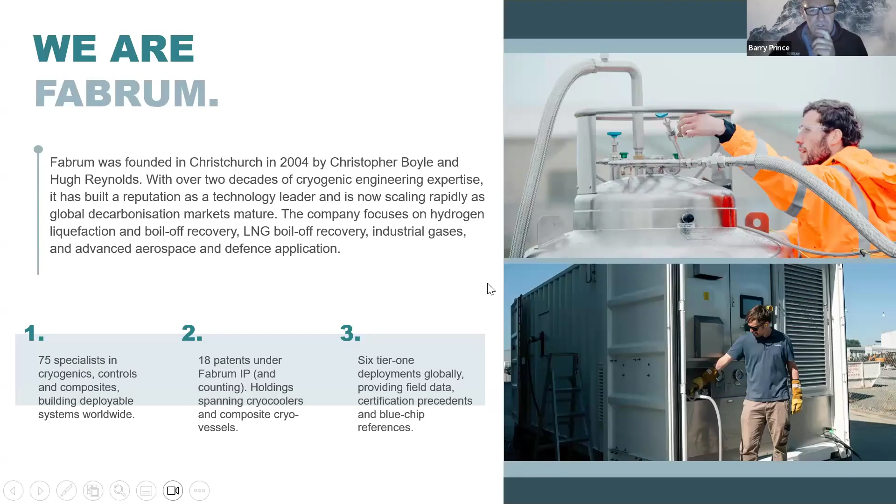Well, for that to be true, liquid hydrogen is a key part of that whole hydrogen ecosystem. And so with all of the expertise in cryogenics, FABRUM felt it could make a significant contribution in that space, as we're currently doing. So just to give you a bit of an idea of the sort of work that we do in the hydrogen space and our expertise, I'm just going to show a recent project that FABRUM was involved in. So this is a bit of drone footage from a mine site in Western Australia.

The client for this project is a company called Fortescue, a big iron ore mining company based in Western Australia. They wanted to demonstrate that they could decarbonise their mine site. Specifically, they wanted to demonstrate they could run their big haul trucks on liquid hydrogen. To do that, they needed a liquid hydrogen liquefier on site.

So Western Australia is a fairly remote place. Perth is the capital city of that state of Australia. Perth is the most remote city in the world. And this mine site's about 1,000 kilometres north of Perth. So very remote location, very punishing environment. The temperatures regularly go above 50 degrees Celsius. And it's a very dusty environment.

So what you're looking at in this photo, in the background under that canopy, are electrolyzers. They're being fed electricity from a solar array, so they're producing green hydrogen. That's fed through a pipeline to the plant at the front here. That's the hydrogen liquefier that was designed and manufactured by FABRUM. So all of the cryocoolers that are doing the cooling of the hydrogen are in the 3 containers in the foreground, and the containers just behind that have all the heat rejection and control systems.

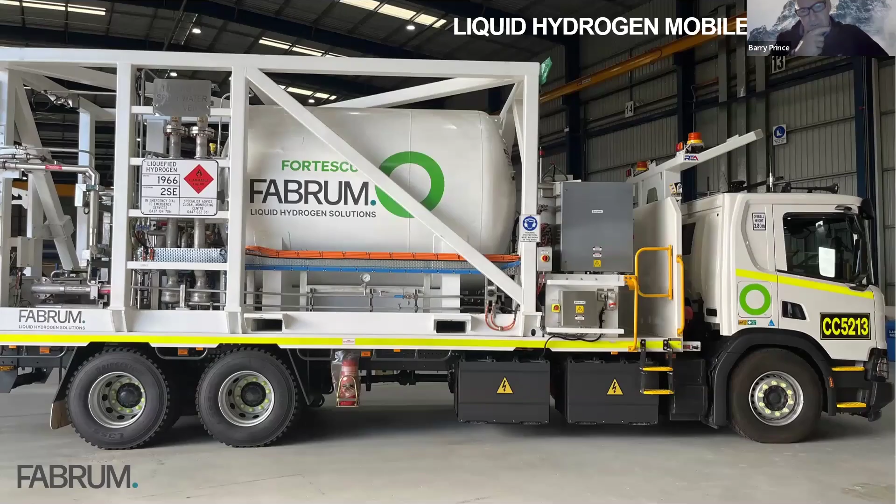And the primary vehicle that it is refueling is this. This is a liquid hydrogen mobile refueler. It carries about 600 kilograms of liquid hydrogen, and it has all of the infrastructure on board for doing liquid transfers. It's built into a standard 20-foot ISO frame, so it can be easily transported or relocated. And this vehicle will then refuel liquid hydrogen into a couple of other vehicles.

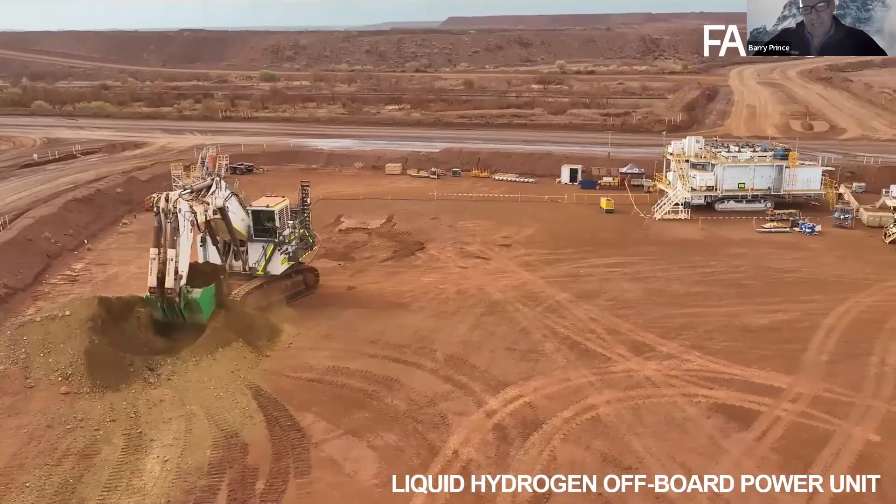Firstly, the vehicle on the right-hand side of this looks maybe a bit more like a building than a vehicle, but you can see it's on tracks there. It can travel around behind the excavator on the left. That excavator is 100% electric powered and, difficult to see, but there's a big power cord running along the ground to the vehicle on the right. It's called an off-board power unit, and the off-board power unit has storage of about half a ton of liquid hydrogen that is feeding fuel cells, producing about 1.3 megawatts of electricity to power that electric excavator.

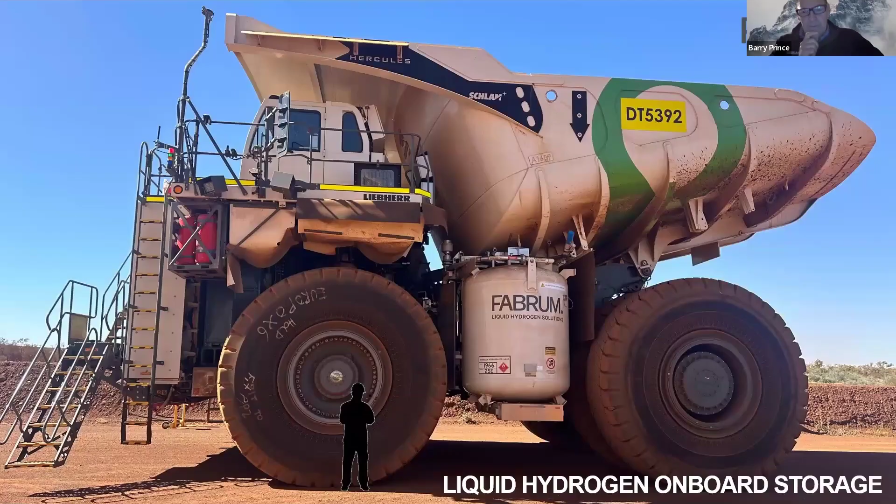But ultimately, this project was about proving these trucks could run on liquid hydrogen. So this is a 300 ton haul truck. This truck would typically consume about 2.5 to 3 tons of diesel in a 12-hour shift. This truck running on liquid hydrogen will do that 12-hour shift by consuming about 500 kilograms of liquid hydrogen. And that hydrogen is stored in 2 of those FABRUM tanks, one on each side of the vehicle.

And so, as I say, this is quite a nice demonstration of the sort of work that FABRUM gets involved in. Everything in this project that had anything to do with liquid hydrogen was designed, manufactured, and deployed by FABRUM. So that includes the hydrogen liquefier plant, all of the liquid storage, the liquid transfer systems, dispensing and refueling systems, onboard storage, and the storage delivery systems.

So if you look at the products that FABRUM manufacture, they're largely underpinned by 2 technologies that the company has developed. So I'm just going to talk about them on this slide. So firstly, on the left, we have a proprietary cryocooler. In the middle of that circle, you can see that cryocooler. It's essentially a very powerful refrigerator, works on the same principle as your domestic refrigerator at home, compressing and expanding a refrigerant gas, but much more powerful. And that underpins all of our products that deliver cooling power. So it's nitrogen and oxygen liquefiers, natural gas liquefiers and boil-off gas management systems, and of course our hydrogen liquefiers and boil-off gas systems.

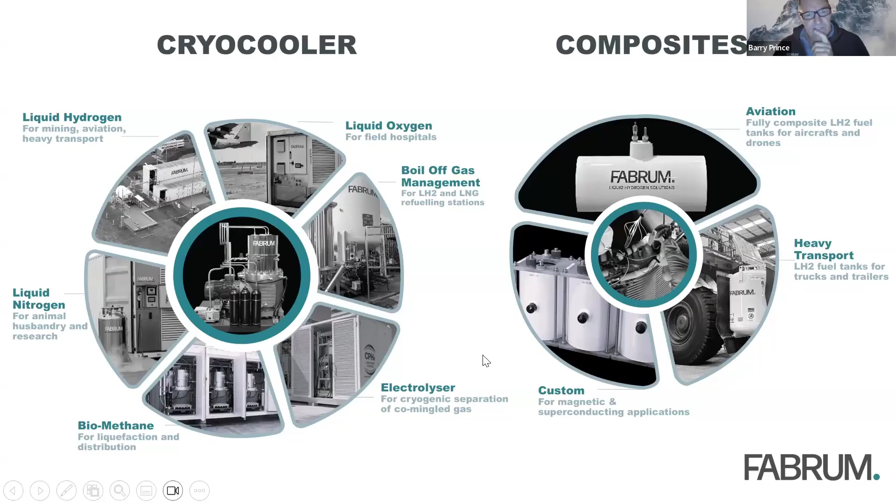On the right-hand side of this slide is the other core bit of technology that FABRUM has developed, and this is manufacturing techniques that enable us to build these super lightweight storage vessels for liquid hydrogen. That, of course, is what we're going to get into in a bit more detail as we roll through this talk. So before we get onto the tanks, what are the other products around the cryocooler that FABRUM are producing? Because these do also have some relevance, as we'll see, in the aerospace sector for hydrogen powered flight.

So firstly, the hydrogen liquefiers. We've talked about the larger one at the top left of this, the system that's installed in the Pilbara in Western Australia. To the right of that at the top is a system built into a 40-foot shipping container that will produce up to 75 kilograms of liquid hydrogen a day. That system pictured there is currently being installed in Germany at the Karlsruhe Institute of Technology at their energy lab. In fact, it's at the heart of their energy lab, producing liquid hydrogen that's underpinning all of the R&D that they're doing for cryogenic hydrogen at that site.

Bottom right is a smaller scale liquefier that we produce. We call it a development scale, and it can be configured to produce from 3 to 20 kilograms per day. The liquefier pictured there is operating in Kemble, Cotswold Airport in the UK, actually the site where ZeroAvia are based, and that's been operating for a few years there, producing liquid hydrogen that's supporting the development of technologies for liquid hydrogen in aerospace.

And finally, on the bottom left is a system that's in a 20-foot container. It can operate as a liquefier and produce 30 kilograms a day liquefaction rate. Actually, this system uses a different technology to the other liquefiers on this page. And so as well as operating as a liquefier, this can operate as a reliquefier, okay? The difference being the temperature of the hydrogen that is being supplied to the unit. So a liquefier is taking hydrogen from ambient temperature down to the condensation point. A reliquefier is taking boil-off gas, so it's taking cold hydrogen that's in gaseous state and just dropping the temperature a smaller amount to recondense it, and so that's a boil-off gas management system.

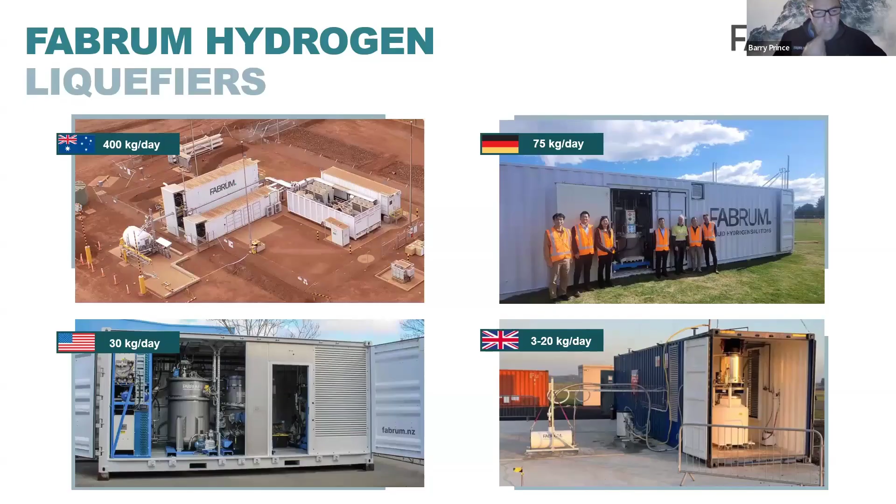So there's two main sources of boil-off gas in that space, and that's the normal evaporative rate of the liquid hydrogen storage tank, but also the cryogenic pumps that are used to compress hydrogen to boost the pressure for refueling produce low pressure hydrogen gas that needs to be managed, and that's what that unit is doing. And I think we've got another picture of that system here that talks about boil-off gas management.

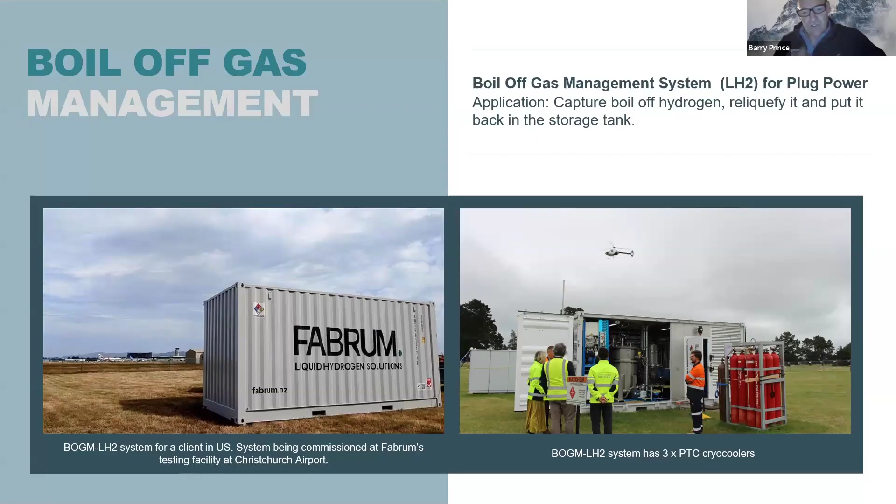So these systems, both the liquefiers and the boil-off gas management, have, as I say, some relevance to aerospace applications, in the sense that these can be deployed in the field, right? They can be deployed at the point where liquid hydrogen is being refueled or is being dispensed. And so having cooling power at those locations gives you a lot of options and more flexibility to build an efficient liquid hydrogen system. One of the big challenges we all know with managing and building liquid hydrogen systems is managing the boil-off gas and building an efficient system where you don't end up venting large quantities of hydrogen. So having the ability to deploy cooling power at the sites that the hydrogen's being dispensed or being used gives you some flexibility to support that.

All right. So that's the cryocooler technologies. And then the other technology, of course, is the composite tanks, which is the purpose of the webinar today. So we're going to dig into this, and FABRUM builds a range of composite tanks for mobility applications that really care about lightweight tanks, right? So it's primarily in aerospace, but also for motorsport applications. There's a lot of interest for these tanks. So we manufacture conventional double skin cryogenic tanks where there's a liquid containing vessel that's a pressure vessel surrounded by a vacuum jacket for insulation.

In addition to that, FABRUM has a patent for what we call a triple skin tank, and that overcomes a couple of the major challenges with a cryogenic fuel tank with regard to the efficiency with which the tank can be refilled, particularly from ambient temperatures. And I'm going to explain a little bit more about that triple skin tank in a minute.

But before we dig into these tanks, I just want to step back a bit and talk a little bit about why we care about this. Is there really a future for hydrogen and liquid hydrogen in aviation? And how important are these tanks for this? I don't want to belabor the point for this audience. I think we're all fairly well versed in these arguments, but it's maybe interesting just to look at the arguments through a slightly different lens. So let me just touch on this quickly.

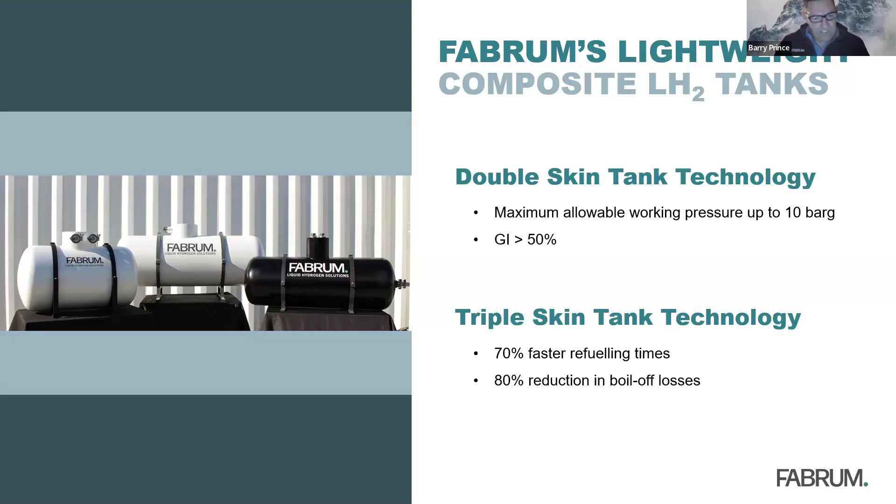And you can see, depending on the price of your liquid hydrogen, you can make an argument that you can run a lower cost operation than using fossil fuels, right? Depending on the price of the liquid hydrogen. But if liquid hydrogen can meet the price points that are being projected, certainly in the range of, say, 2030, then these arguments really stack up.

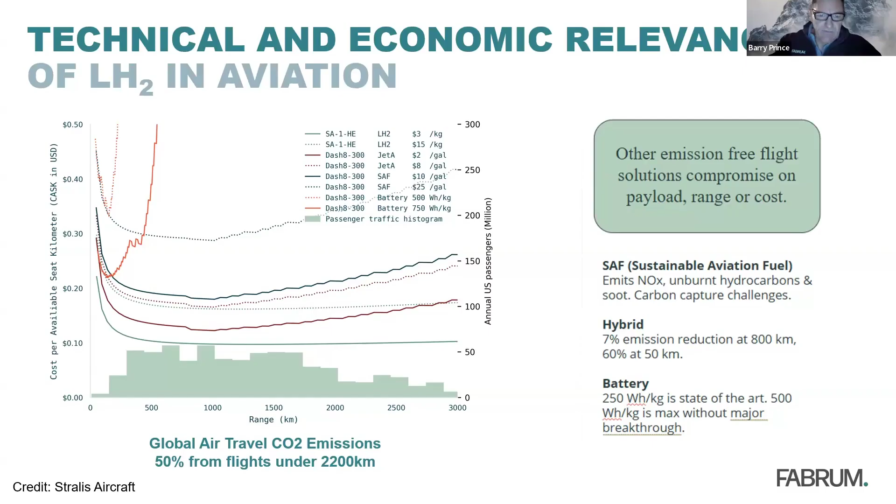The critical metric for aviation, and not just aviation, all of the hard to abate sectors we're talking about, mining, aviation, heavy transport. Why are these sectors called hard to abate? It's because they rely on this characteristic of fossil fuels that it has a very good specific energy, right? And it's very difficult to find an alternative fuel for that.

Batteries have come a long way compared to old lead acid batteries. When you look at lithium ion batteries in terms of the specific energy and the volumetric energy density of those, they've improved orders of magnitude, but they're still a long, long way away from competing with fossil fuels. It's not to say there's no place for batteries, but with regards to this specific metric, they've a long way to go.

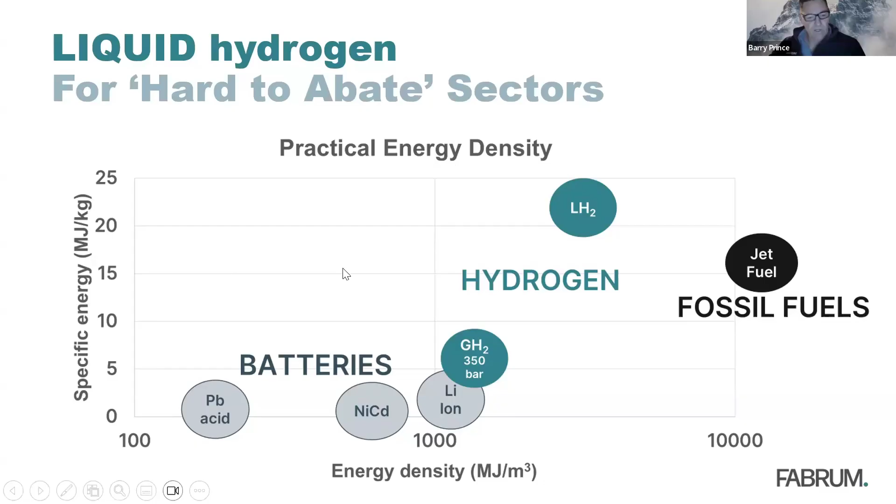And the thermal conductivity of composite is much, much lower than metal. So the thermal performance of a composite cryogenic tank will outperform a metal tank. But also the composites, with regards to the number of pressure cycles that they can undergo, far exceed metal tanks, by up to a couple of orders of magnitude, for the number of pressure cycles.

Now, it's not to say that there's no challenges with building cryogenic tanks, particularly for hydrogen. Composites, by their nature, are known to be quite porous, and hydrogen, of course, is the smallest molecule. So managing the permeation of hydrogen through these vessels is an important part of developing these tanks, and also understanding really the lifetime of these tanks, not just with regards to pressure cycles, but pressure temperature cycles. They'll be cycling temperature from ambient to minus 250 degrees, right?

So there's a challenge there, but there is a growing body of knowledge around these challenges that's being developed not just by FABRUM, but by others around the world, and that growing body of knowledge is showing that these challenges can certainly be overcome. They're not showstoppers. Fair to say that I think there's an acceptance that cryogenic fuel tanks on vehicles will be composite. Composite will be the material of choice in these sort of applications in the future.

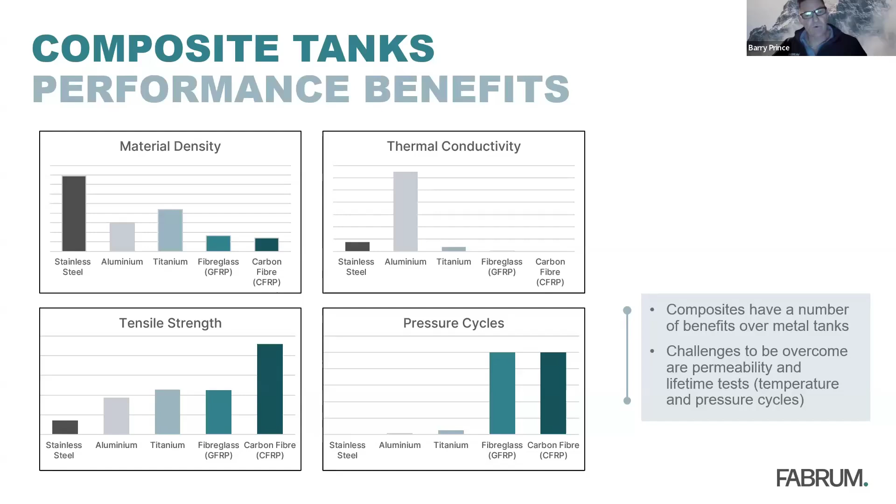So rather than developing a system to a point and deciding what are the characteristics of the tank that you need to fit into that, you really want to look at the tank along with everything else from the get-go. But first, let's look at some of the considerations for a composite fuel tank. I'm going to start with the operating pressure.

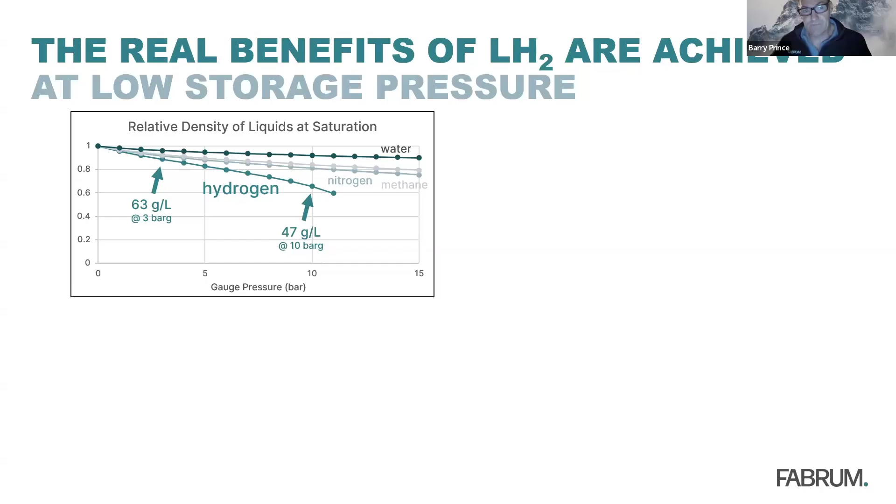So what does that mean? Firstly, it means that for a given volume of tank, you've got a lot less fuel on board, right? But not only that, because the tank with less fuel on board is also containing a higher pressure, so it needs to be heavier, right? So if we were going to build a composite tank with 40 kilogram capacity, building that to operate at 3 bar gauge, it would weigh about 50 kilograms. At 10 bar gauge, you're looking at maybe 90 kilograms, that sort of range, right?

So both of these things act together to the detriment of the gravimetric index of your system, the mass efficiency of the system. So you have this double whammy effect. And so the gravimetric index for our 40 kilogram capacity system operating at 3 bar G would be somewhere near 45%, which is to say 45% of your fuel system is fuel, right? But at 10 bar gauge, that would drop to about 30%. So pretty significant. So if you can operate at lower pressures for your liquid hydrogen storage, you have some significant benefits in the gravimetric index of your fuel system.

All right, so the second consideration I want to talk about is the dormancy. So dormancy relates to the amount of time: if you fill a cryogenic fuel tank at low pressure, it can sit there for a period of time, building pressure until it will ultimately hit a relief pressure and start venting hydrogen. And that's the dormancy period, the time between filling to the time that you start venting hydrogen. And people care about dormancy because you don't want to fill a liquid hydrogen powered aircraft and then have it sitting on the runway having to vent hydrogen.

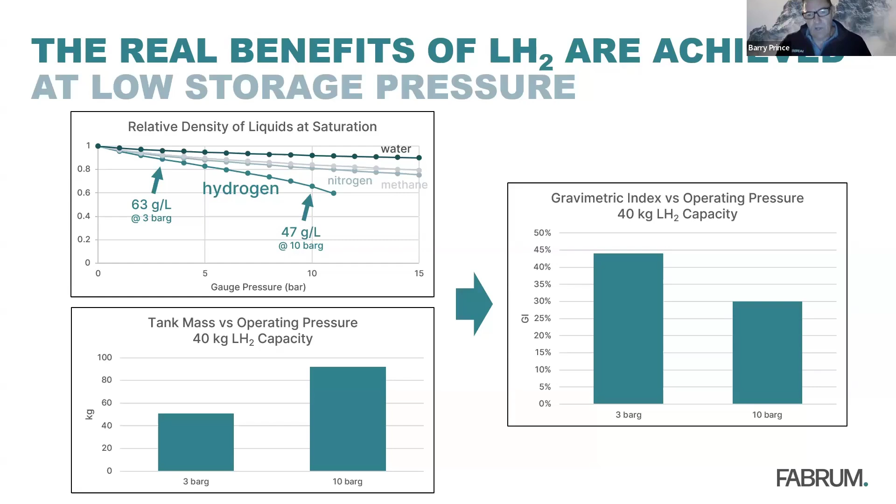So it's an important consideration. The dormancy is related to the insulation of the tank, right? The smaller the heat leak, the longer the time for the hydrogen to boil off and build pressure to the relief pressure. But the point I want to make here is that there is a trade-off in building a good dormancy, because insulation typically adds weight. So you can build a tank with a lower heat leak and a longer dormancy, but it will likely be a heavier tank. So the point of this slide is to make that point.

If you imagine a system, we're looking here again at a 40 kilogram capacity composite tank, and let's say it's on a system that's feeding a 120 kilowatt fuel cell. If we were to design that tank, it could easily have a 10 watt heat leak, and that would give it a dormancy of 48 hours. But you only care about that until the point that the fuel cell is being fed by hydrogen.

Okay, the amount of heat that you need to put into the tank to deliver hydrogen to a 120 kilowatt fuel cell is orders of magnitude more than the heat leak that the tank has. So you're going to be putting in 750 watts just to evaporate the hydrogen, and then another 8.5 kilowatts to bring it up to the temperature needed for the fuel cell, right? So the point here is, as soon as you're operating the aircraft, you don't care at all about the heat leak of the tank, right?

So it's important to design the heat leak of the tank that matches the use case of the tank. Okay, as soon as you're operating, you don't care about the heat leak, so you don't want to be carrying around extra weight in your tank that is giving you a dormancy period that's actually not being utilized.

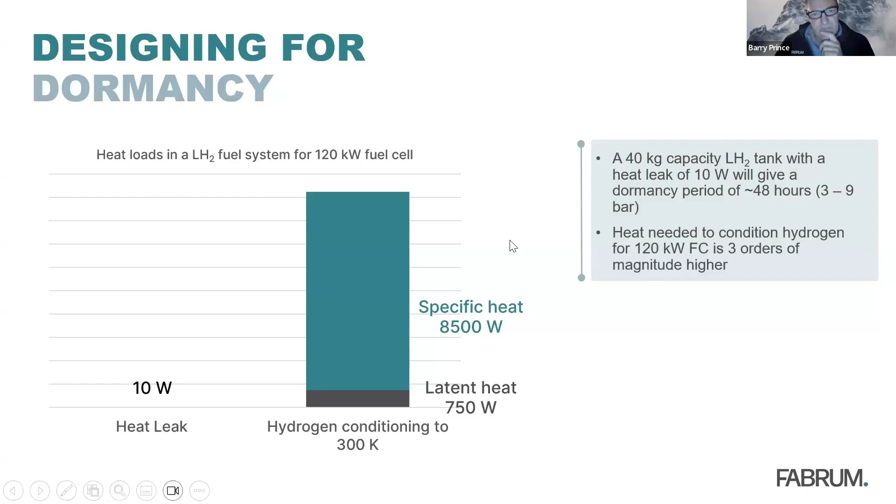All right, so let's talk a little bit about refueling of these tanks. For cryogenic fuel tanks, it's particularly important when you're refueling from ambient temperatures, right? So a particular challenge when refueling a cryogenic tank from ambient temperatures is how you can do it efficiently, how you can fill it quickly and minimize the losses.

So typically, you would take a fairly extended period to fill a cryogenic fuel tank to slowly cool the vessel that's going to contain the liquid hydrogen, so that you don't thermally shock the tank. In the same way that if you pour boiling water into a cold glass, you can crack it. You need to change the temperature of these tanks slowly, particularly for a composite tank, although it applies to metal tanks as well, you can thermally shock those.

So you need to cool it slowly, and also in cooling it, you're losing a lot of your cryogenic fuel, evaporating it and cooling the tank down to the boiling point of that cryogenic fuel so it can start to condense. Okay, so this triple skin tank deals with this by adding a third skin. If you look at the diagram on the left, the third skin is inside the pressure vessel of a conventional double skin tank. So the cryogenic fuel would normally reside in that pressure vessel, but in this triple skin tank, there's a liquid vessel inside that which is containing the cryogenic fuel.

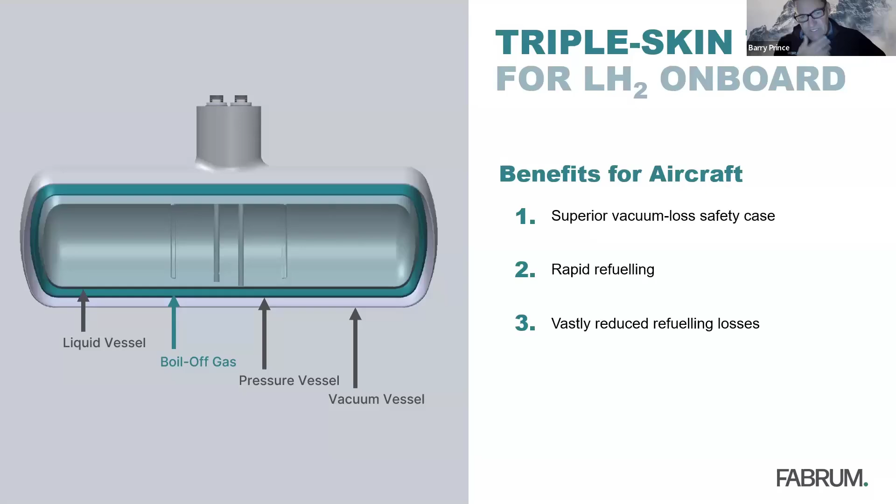And in fact, the preliminary tests suggest that the heat load on that tank would not even exceed the heat load that you would deliberately be putting into the fuel tank to drive the hydrogen out to feed your fuel cell or your engine. So let's just have a bit of a closer look at how the refueling efficiency works.

So just looking at, firstly, a conventional double skin tank here, and if you look at the chart at the bottom, it just plots the temperature of the pressure vessel in a double skin tank as it's being refueled. So it starts at ambient temperature, 300 Kelvin, and it drops down. Let's say you're fueling over 30 minutes or so, or cooling the tank over 30 minutes. The temperature drops to the condensation point of hydrogen, and then it levels out at that point.

And in the top chart where you can see the amount of hydrogen either lost or filled into the tank, you can see while the tank is cooling, you've got losses. There's no condensation in the tank. So you're not filling the tank, you're just losing hydrogen as boil-off. As soon as you hit the condensation point, then the boil-off levels out and the tank will fill.

So how does that look different for a triple skin tank? So the grey lines in the background are the double skin tank. And now, if you look at that bottom chart, there's two traces now because there's two vessels, the pressure vessel and the liquid vessel. Now, the liquid vessel cools very quickly, about 5 minutes to cool that. And then once you hit the condensation point again, the temperature levels out.

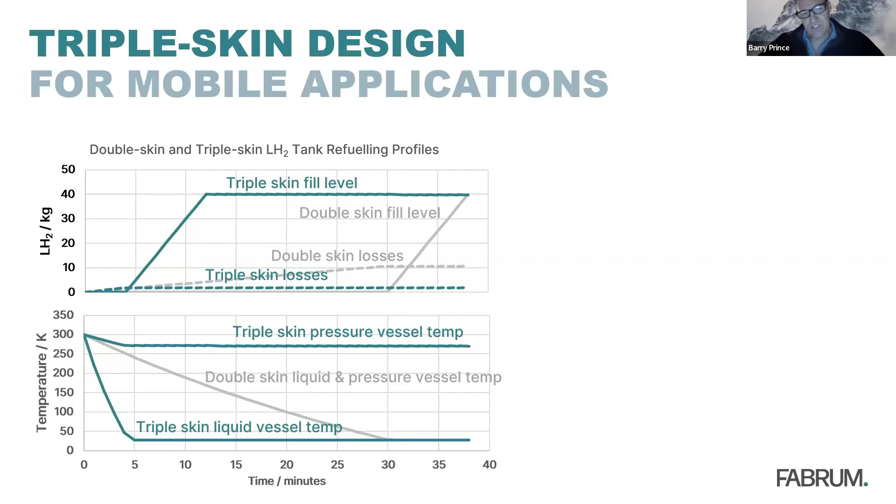Now, if you look at the top chart, you can see the same effect as for the double skin tank. The losses that you're getting really only occur during the cooling of the liquid vessel, so over that short first period, and then they level out. You start filling the tank after 5 minutes when you've cooled that liquid vessel. So overall, the refueling time is much, much faster, maybe 3 times faster on the triple skin tank compared to the double. And the losses of hydrogen in refueling are even more significantly better, more than 5 times reduction in losses.

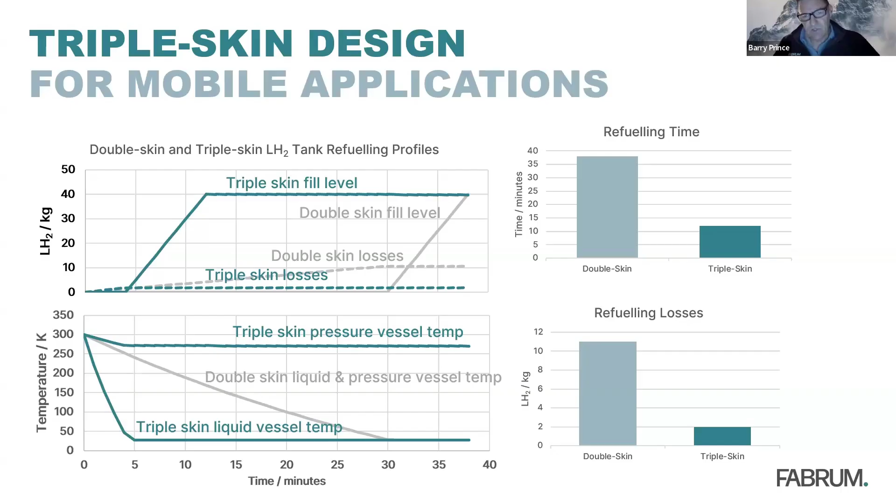Okay, so finally, I'm just going to make the point that to gauge the suitability of a tank, the ideal design for a tank, you need to consider the overall system, and that extends even beyond the aircraft. The whole system, starting from the right, considers how the hydrogen is going to be consumed, whether it's a fuel cell, internal combustion engine, jet engine, the conditioning of the hydrogen, how it's stored. That's all of the aircraft systems.

But even before that, the refueling, where the hydrogen is produced, and the impurities in the hydrogen, those sort of things can play a part in this, but particularly the hydrogen liquefaction. Is the hydrogen liquefied remotely and transported to the point that it's being refueled, or is it being liquefied at the site that it's being dispensed? If you're liquefying hydrogen at the site that it's being used, that gives you a lot more control over the state of the hydrogen that's going into the aircraft, whether it's subcooled, what the saturation point is, and so on. So that can be a key factor in the design of your onboard systems.

And so it's important to consider these factors, and the area on here that FABRUM gets involved is that red dashed box there. So from the ground, from the hydrogen liquefaction systems with our small scale hydrogen liquefiers, but also all the refueling infrastructure to transfer liquid hydrogen into the tanks on board the vehicle, and then the storage and the gasification and conditioning systems to get it to the right pressure, temperature, flow rate to feed the consumption device. That's where FABRUM operates.

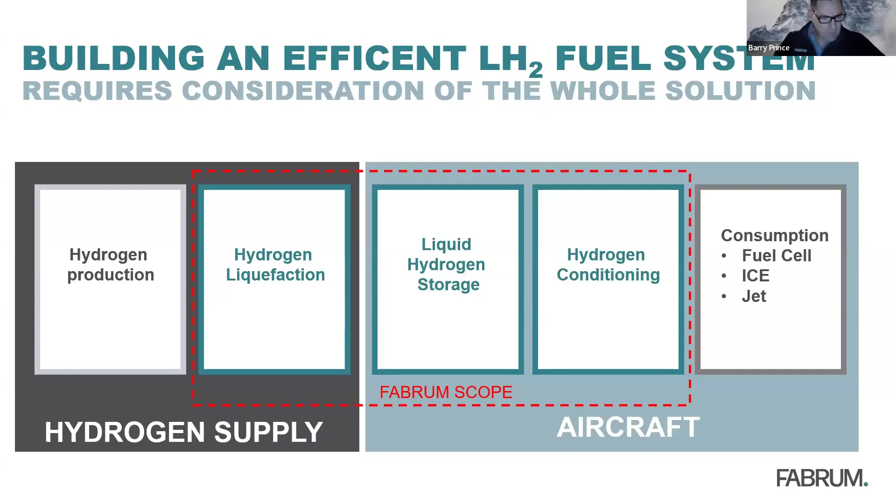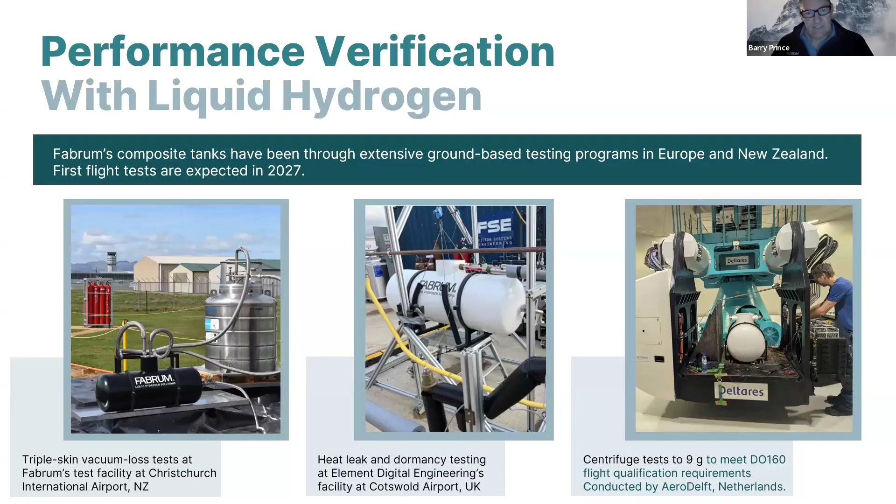And there's a number of companies that are working in this space, just sharing a couple in this part of the world. Crux Aerospace is a New Zealand startup that are converting a New Zealand manufactured aircraft, a PAC 750XL. It actually has some characteristics that make it very well suited to convert to a hydrogen powered aircraft in terms of its payload and the cargo space, and so on. So they will be converting that aircraft to liquid hydrogen.

All right, so the final thing I want to just talk about is another initiative that FABRUM is launching down here in this part of the world. So this picture here is a photo from a temporary liquid hydrogen test facility at Christchurch International Airport. And later this year, we're establishing a permanent liquid hydrogen test facility at that site.

So this site will have a hydrogen liquefier that can produce from 50 to 100 kilograms of liquid hydrogen per day. The site will support the development programs of these composite tanks and other liquid hydrogen technologies that FABRUM is developing, but is also available for the use of other organisations that have a need to get access to those quantities of liquid hydrogen and facilities where they can conduct some testing.

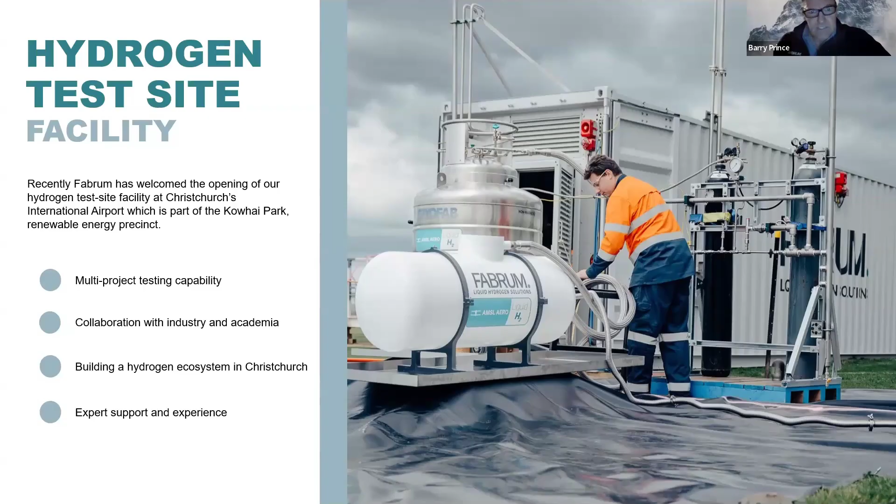So if any of you are looking for an excuse to come down and visit us in New Zealand, maybe this is the excuse you need. So we'd love to see you down here.

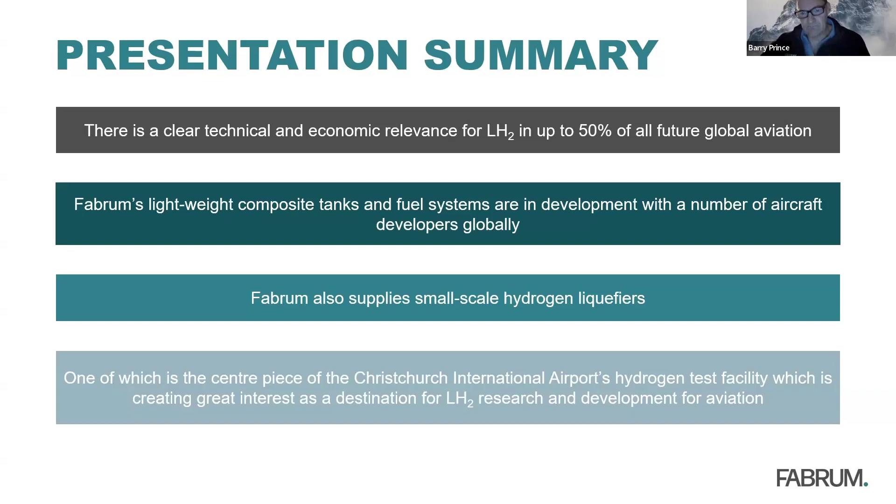And also the small scale hydrogen liquefiers can play an important role in making these overall systems as efficient as possible. And finally, the liquid hydrogen test facility that will be up and running here in Christchurch by the end of the year will play an important role in the acceleration of the development of these technologies to enable liquid hydrogen powered flight both in New Zealand and around the world.